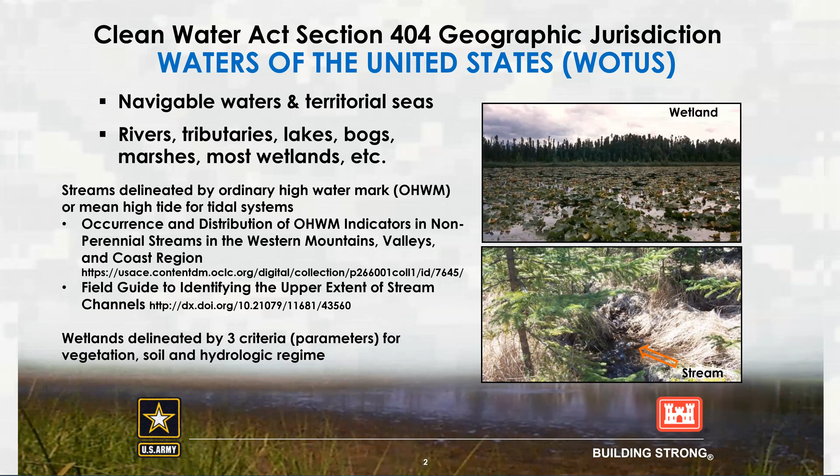If you wanted to get into more detail, there certainly is some guidance out there. In my opinion, the manual that's been written for the Western Mountains, Valleys, and Coast region for ordinary high water mark, which really covers the more humid portions of the Pacific Northwest and the Rocky Mountains, appears to have very good applicability for small streams in Alaska. Just very recently, I think it was late last week, the Corps published a technical report called Field Guide to Identifying the Upper Extent of Stream Channels, and that probably should be helpful as well. Next slide.

Discharge or placement of fill material in streams most often involves construction of roads and utilities, but it may stem from other types of activity. Fill placement may occur via mechanized land clearing, channelization, temporary stockpiling, that type of thing.

Some of these discharges are actually exempt from Section 404 for certain agricultural and natural resource management activities, including the construction or maintenance of farm roads, roads for forestry operations, or temporary roads for moving mining equipment. However, there is criteria that must be met, essentially that some best management practices assure that flow and circulation patterns are maintained and that the chemical and biological characteristics of the waters are not impaired. Next slide.

There are two main types of permits issued by the Corps: general permits and individual permits. General permits include both nationwide permits and regional general permits, and only authorize certain activities that have minimal individual and cumulative impacts to jurisdictional waters. These are programmatic permits, typically issued every 5 years, and they generally last for 5 years. Prior to their expiration, the Corps reviews the applicability of each general permit with assistance from interagency coordination and public comment, and we determine whether they should be reissued, retired, or modified.

Regional general permits are issued district by district, and regional general permits issued in the Alaska district, as we call it, covering the entire state, include those that authorize specific activity statewide and others that are specific to certain regions of the state.

Individual permits are mainly issued as standard individual permits, which are for activities that would have more than minimal impact to waters of the United States. Individual permits involve a comprehensive review of proposed activities, including coordination with other resource agencies, and require issuance of a public notice describing the activity and the dates of the comment period, which typically lasts 30 days and allows the public to weigh in on the proposal.

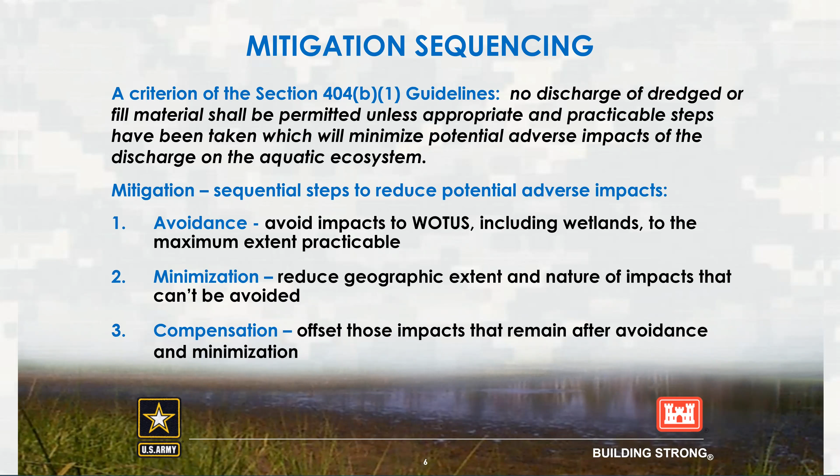So as you may know, the 2017 nationwide permits have expired and a new set of nationwide permits have been issued in their place. This recent replacement was a bit off schedule, as nationwide permits are typically issued every 5 years. The replacement occurred in 2 phases.

The first phase was in January of 2021, and the second phase occurred just this past December. That second set just went into effect February 25th of this year.

So now there are 57 nationwide permits total. 52 were pre-existing, and there are 5 new ones. Though they were released at different times, they will all expire on March 14th, 2026. Now note that there are 57 nationwide permits in total, but they number from 1 through 59, as there is no nationwide permit 26 or 47.

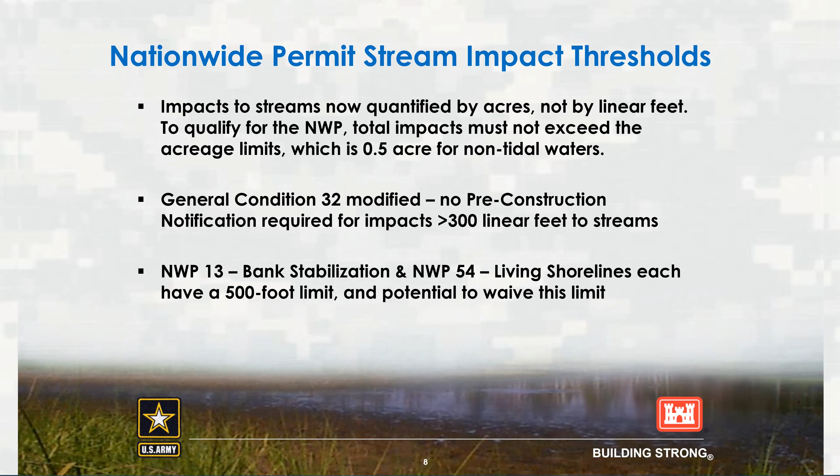Here are a few nationwide permits that are typically used for stream crossings. Nationwide 14, linear transportation projects, is probably by far the most common. This permit allows for up to half an acre of impact to non-tidal jurisdictional waters or no more than one-third of an acre impact to tidal waters for the construction or modification of roads, trails, runways, etc.

As part of the recent changes with the nationwide permit reissuance, the Corps essentially split nationwide 12, which had been for utilities, into 3 permits. Nationwide 12 is now only for oil or gas pipeline activities. There are two new nationwide permits: nationwide permit 57 for electric utility line and telecommunications activities, and 58 for utility line activities for water and other substances. There are some subtle differences between these permits, but they all have the half-acre impact limit. Then there's nationwide permit 29 and 39, and these continue to have the half-acre limit.

I wanted to also mention nationwide permit 13, bank stabilization, as this is sometimes used in association with stream crossings, or used on its own as a means to control stream bank erosion or prevent a stream's lateral migration. This permit requires that bioengineering and natural materials be used to the maximum extent practicable. There are additional criteria, including that 500-foot limit and the limit to the amount of cubic yardage that can be placed per linear foot. But those two criteria may be waived if it's determined that there be no adverse effect on the aquatic environment. In fact, for root wad projects, one cubic yard of material per linear foot is often met or just barely exceeded.

Of the 32 general conditions that apply to nationwide permits, there are 3 that are most relevant to stream crossings. General Condition 2 states that no activity may substantially disrupt the life cycle or movements of aquatic species unless the project's primary purpose is to impound water. General Condition 3 essentially prohibits discharge of fill in spawning areas during spawning seasons; activities that result in physical destruction through excavation, fill, or downstream smothering by substantial turbidity of important spawning areas are not authorized. General Condition 9 states that the preconstruction course, condition, capacity, and location of open waters must be maintained unless alterations to these factors are shown to benefit the aquatic environment, as with stream restoration or relocation. Next slide.

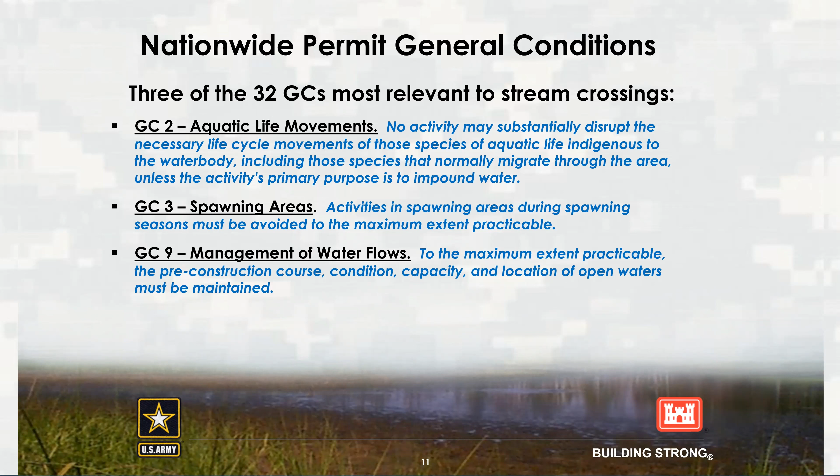Next slide, please. Okay, we got them. A little bit of a delay.

The regional conditions on nationwide permits are issued district by district, and there are 4 regional conditions in the Alaska district that apply to stream crossings. Regional condition B has some varied requirements for certain nationwide permits; as before, an application or pre-construction notification is required for bank stabilization projects if they will not follow the techniques described in the Stream Bank Revegetation and Protection, a Guide for Alaska. Regional condition C addresses trenching: trenches may not be constructed or backfilled in a way that would drain waters, and the backfilled trench must be returned to pre-construction elevations within a year. Regional condition F, maintenance of hydrology patterns, states that natural drainage patterns shall be maintained. Regional condition J applies to those 10 nationwide permits for which the 300-foot limit was removed, and states that the project must not involve placing fill in anadromous streams or waters, including wetlands adjacent to or upstream of anadromous water bodies.

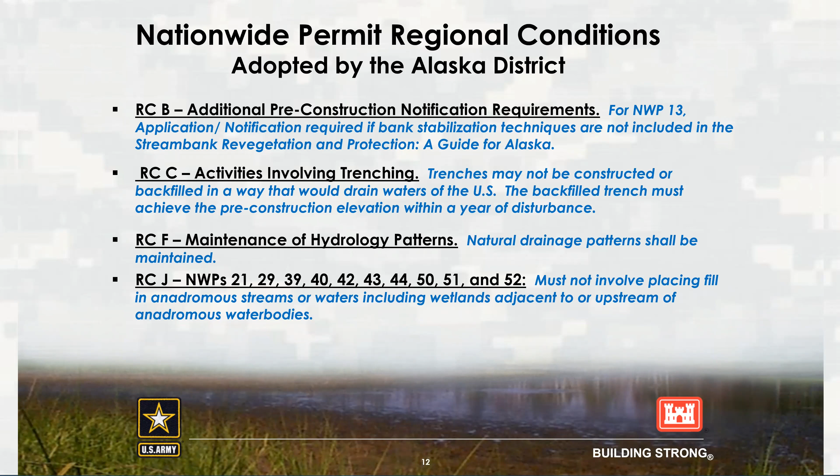Okay, next slide. So we talked about general conditions and regional conditions, and there are also special conditions. Those are applied ad hoc and can be applied to any type of permit, and may be used to constrain the nature or timing of the proposed activity, or may be used to set compensatory mitigation requirements, including performance standards that must be met for the mitigation to be considered satisfactory. Special conditions are often based on recommendations made by coordinating agencies, such as the U.S. Fish and Wildlife Service. Next slide.

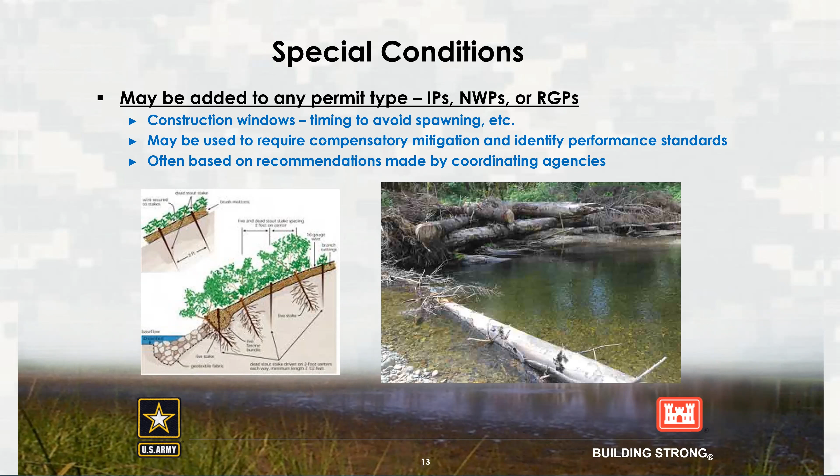Lastly, I just want to talk about the stream quantification tool, which Will Harman helped to develop, and he discussed on Tuesday. This tool was developed to improve understanding of functions of wadable streams and to guide efforts to conserve and restore these streams. The SQT is essentially a functions assessment for streams and may be used to quantify anticipated functional loss from proposed impacts or to quantify anticipated functional gain from restoration or enhancement.

The use of the SQT is not required in the Alaska District or anywhere in the nation, but it is recognized as a relatively rapid, scientifically defensible method. The Alaska District supported development of the SQT for the interior, and we are currently supporting development of the SQT for the Arctic coastal plain.

Bob Henszey of the U.S. Fish and Wildlife Service has been a key player in these developments. I'll now pass the mic over to him to discuss the role that the Fish and Wildlife Service plays in the permitting process. Okay, thank you, Greg.

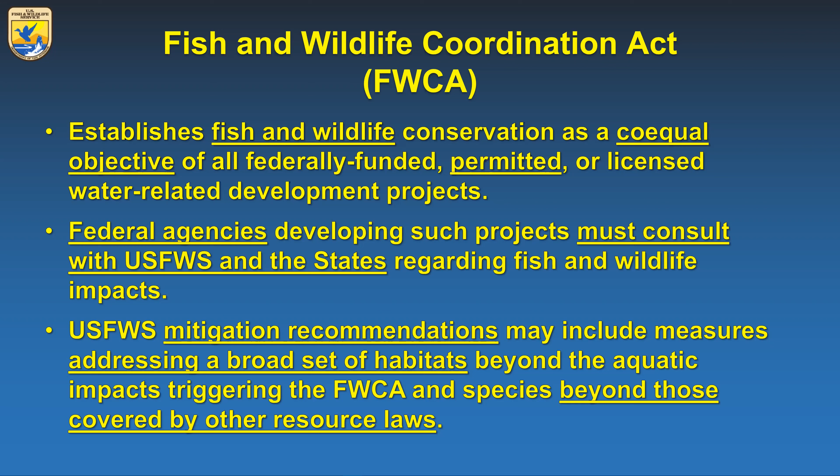The Clean Water Act, which is the one the Corps primarily operates under for stream crossings, right up at the very top recognizes fish propagation and protection for fish, shellfish, and wildlife. So right up at the very top of the Clean Water Act, we recognize this fish and wildlife habitat. The actual statute says the service will submit any comments in writing to the Secretary of the Army, which means my folks will provide comments to Greg's folks in formal letters.

The actual regulations say that we can make factual comments on a whole host of fish and wildlife things, including threatened and endangered species, fish, crustaceans, mollusks, other aquatic organisms in the food web, other wildlife, and I could go on - but basically it gives us authority to comment on anything that's fish and wildlife habitat related.

Opportunities for comment - I can't stress this enough - the best time to comment is as soon as you hear about a particular project, before permitting, because that's when project sponsors are considering their plans and budgets. By the time it gets to the permitting stage, like individual permits, they already have everything in place. During that 30-day public notice period, the applicant may already be getting equipment mobilized and ready to go. They really don't want to hear from the Fish and Wildlife Service saying, wait a minute, what about floodplain connectivity? So I recommend getting involved as soon as you can when you hear about a project.

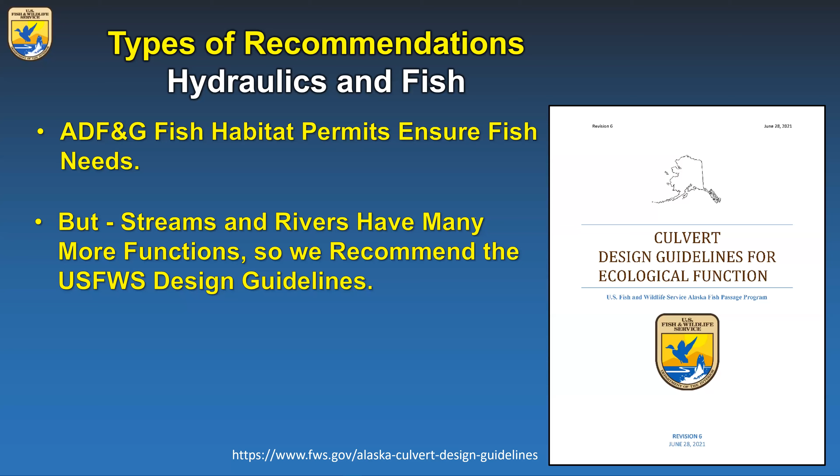Wildlife habitat is one of the main features we comment on in addition to fish. It's pretty easy to comment on the larger, charismatic mammals you can see, like moose and beaver. But as we learned on the first day, riparian and floodplain habitats also provide habitat - some studies say that's the richest habitat in Alaska. What lives there includes fairly secretive migratory birds that fly thousands of miles up to Alaska just to breed. Just because we don't see them doesn't mean they're not depending on that habitat.

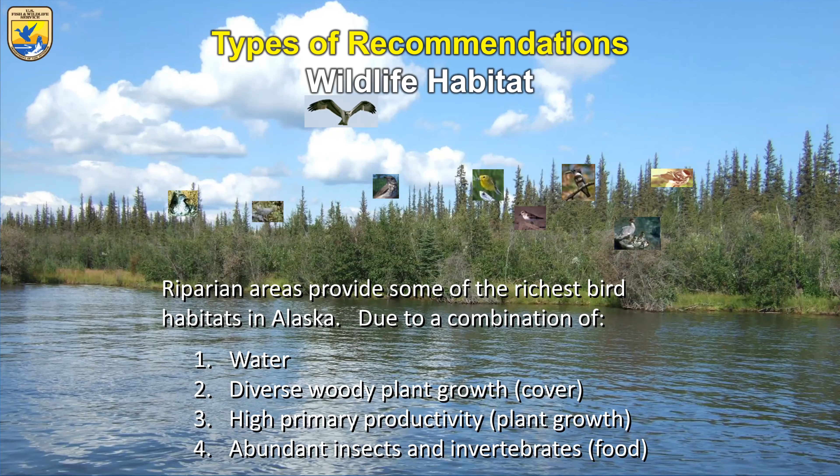Jenny touched on the Endangered Species Act, and I'd like to emphasize going to our ECOS site, now called Ecosphere. By the way, I just learned when Jenny was presenting that my link is out of date, but I checked it and it still works - I'll fix that after the presentation. The key word is IPAC, search for IPAC and Fish and Wildlife Service and that'll come up.

Jenny also talked about the Bald and Golden Eagle Protection Act. One part I really want to stress is it not only protects eagles, but also protects their nests year round - even when the nest is not being used, that nest is protected. So if a tree is in the way of your project, you'll need to talk to our permitting folks and see what requirements they would ask you to do before removing that eagle nest.

The Migratory Bird Treaty Act covers all migratory bird species, which is almost all the birds in Alaska. The best management practice we've come up with, that seems to work best, is to do your work either before or after the breeding season, or if before, make the site unsuitable for nesting habitat. That could mean removing vegetation beforehand or laying a layer of gravel on top of the tundra on the North Slope, something like that.

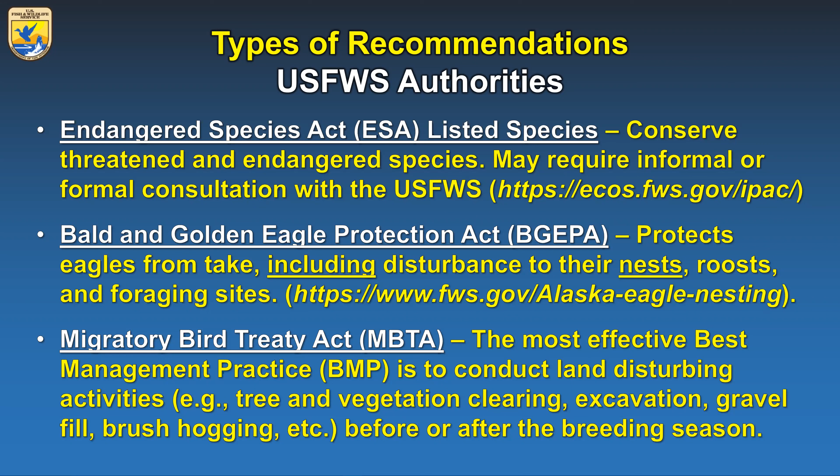We put together timing recommendations for when not to disturb vegetation or the ground during the nesting season, which Jenny also referred to. It lists several habitat types across the top in regions in Alaska, and these are the general breeding or nesting dates in the various areas. These are just guidelines, not enforceable - recommendations that if you follow these dates, more than likely you'll be in compliance with the Migratory Bird Treaty Act.

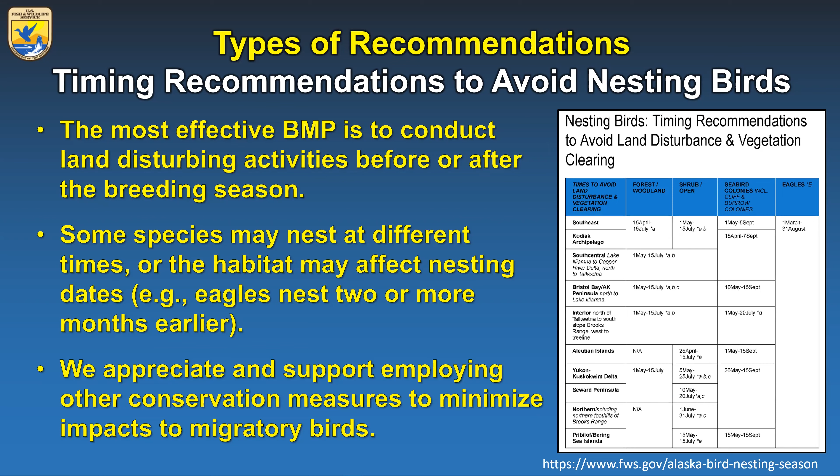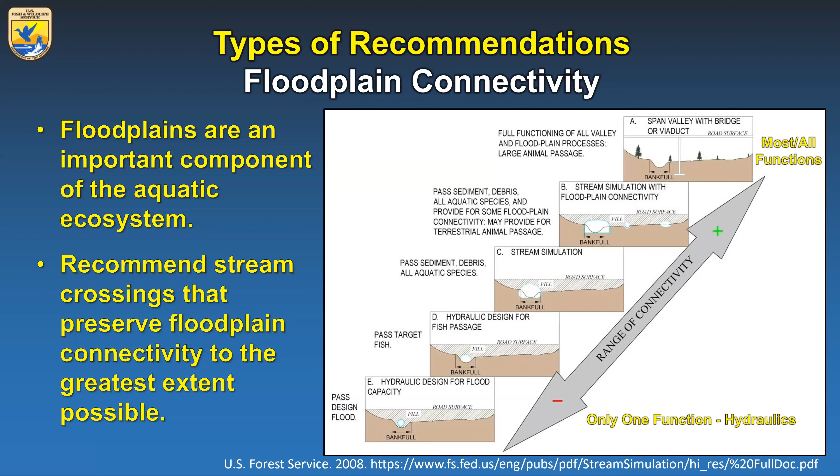Another option when you can't do a full span crossing is to install floodplain culverts, including some side channels or high flow channels, to account for that. That sort of works, but you can end up with water backing up behind these and causing sediment on one side, while on the other you get concentrated flow coming out of the culverts. So you don't really get the spread across the floodplain on wider floodplains unless you add lots of floodplain culverts.

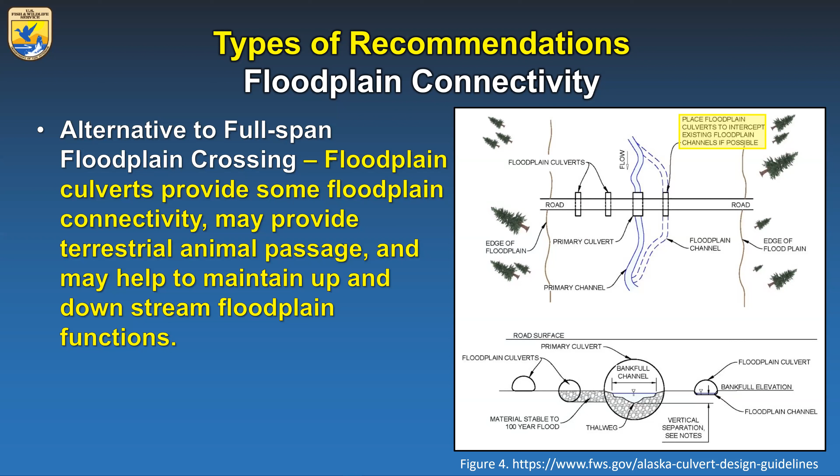You've heard a couple times now about the stream quantification tool for the interior. It also has a debit calculator that recognizes the impacted functions from various ways of crossing streams. Everything from a full span crossing across the floodplain, which is tier 0 or nearly 0 impacts, to a full span bridge with abutments in the floodplain, which has some impacts, all the way down to where the culvert just passes water, which has the most impacts and is rated tier 5.

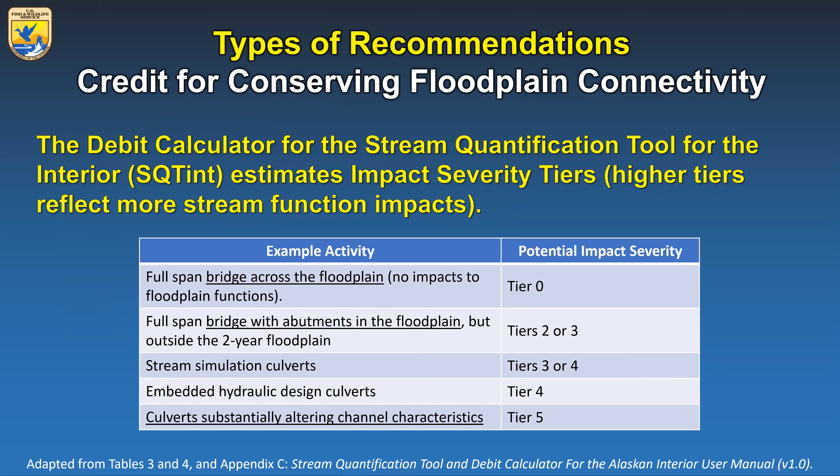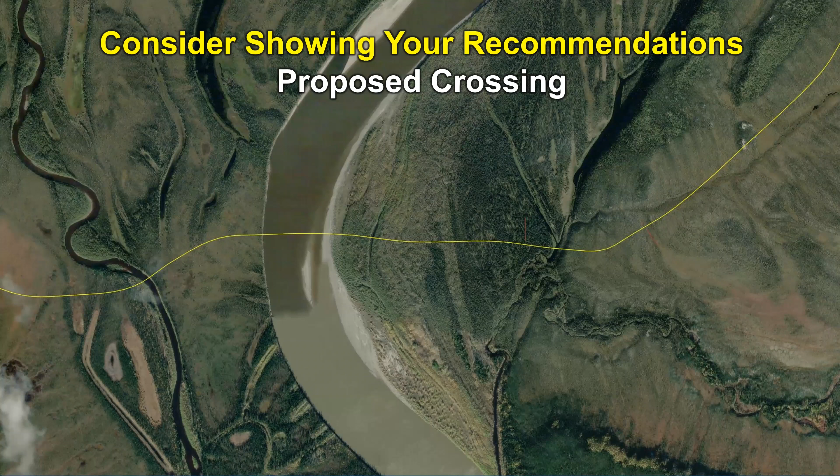Now I have a few figures to show, and I strongly recommend when you provide comments to the Corps or any permitting agency to show your comments in figures, because this really gets the point across. So when we say we'd like a full span crossing across the floodplain, this is what we mean. We also recognize they may not be able to do that, so we'd recommend at least a full span crossing across the channel, though this has more impacts to keep in mind.

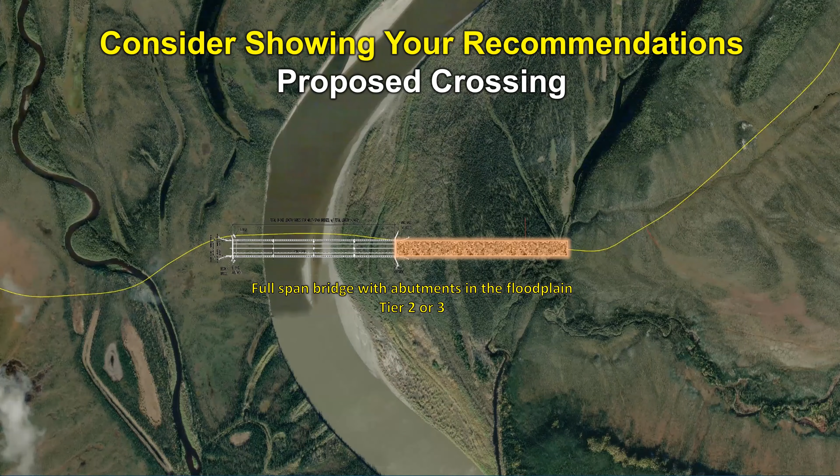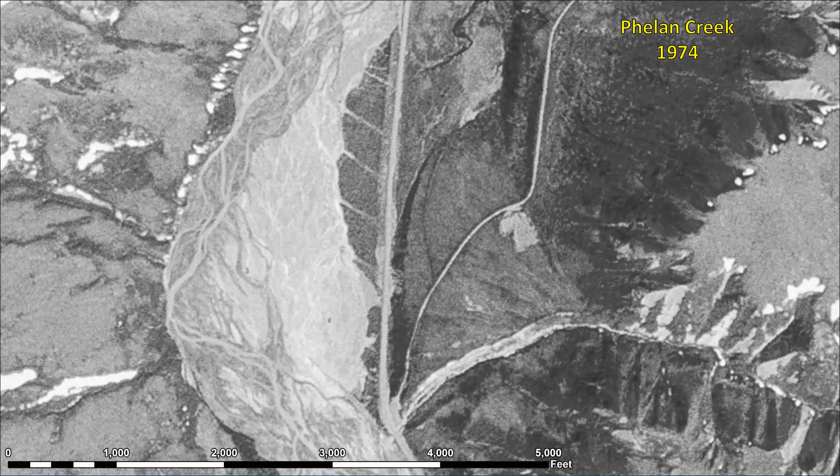So why is this important? I've been looking at this for years, and I finally took the time to look at it through a time sequence. This is Phelan Creek in the Alaska Range on the Richardson Highway, about milepost 205. It's a glacier-fed stream, highly braided channel. There was a proposal years ago to put a crossing across this, about 1,900 feet wide. Notice the thalweg is over here. We had discussions about choosing where to put it, and they chose to put their full span bridge right where the thalweg was.

Sometimes that might be good habitat, creating temporary riparian habitat that's great for migratory birds. But it's not always great. I worked on the Platte River in Nebraska, where sandhill cranes roost overnight in the shallow standing water of the river. This kind of change would be a complete elimination of that particular habitat.

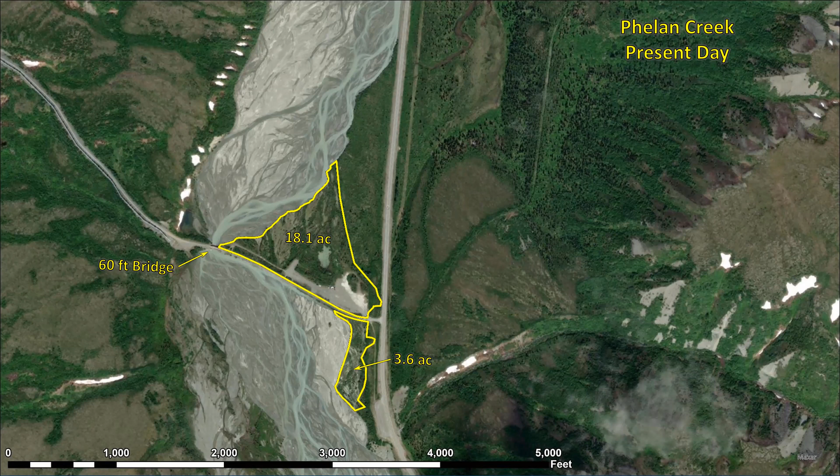Greg also mentioned special permit conditions. We can recommend special permit conditions. In this case, we made a special permit recommendation stating stream crossings shall preserve floodplain connectivity to the greatest extent possible. The Corps looked at it and said that's great, they'd use it, except they tweaked the wording to 'the greatest extent practicable,' which has a legal meaning that includes the cost of doing so. So, possible with the cost included.